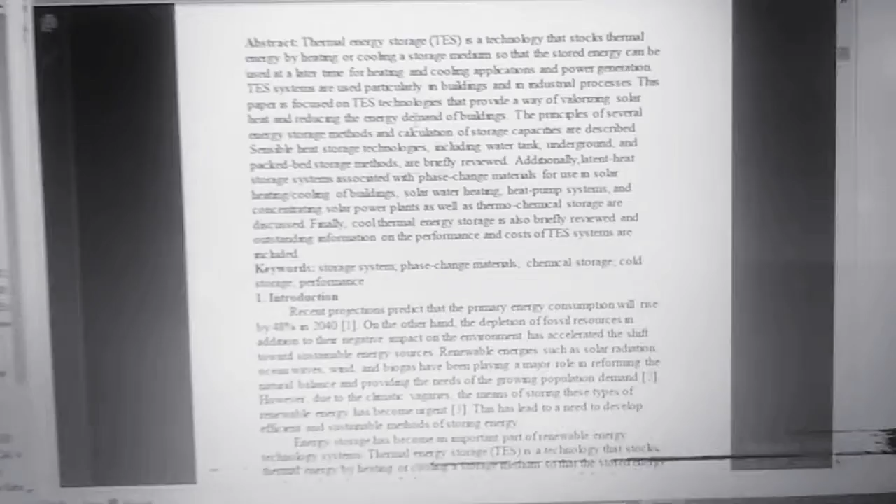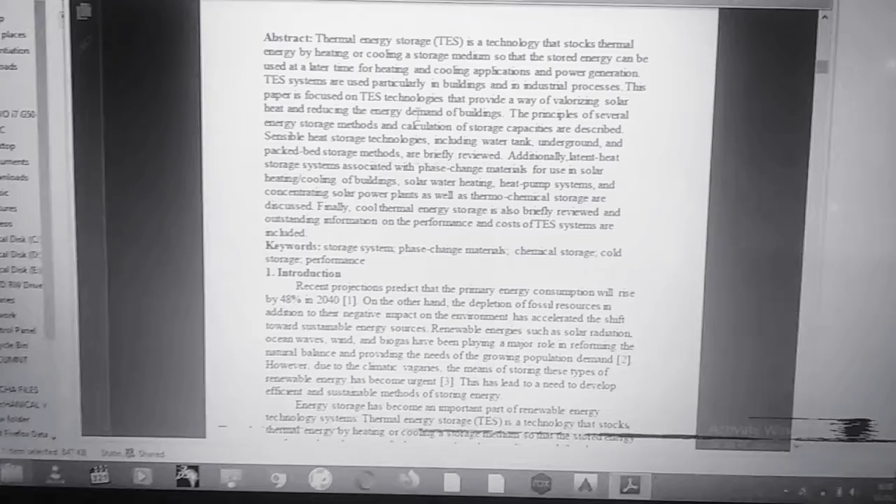Abstract. Thermal energy storage, TES, is a technology that stores thermal energy by heating or cooling a storage medium, so that the stored energy can be used later for heating and cooling applications and power generation. TES systems are used particularly in buildings and industrial processes.

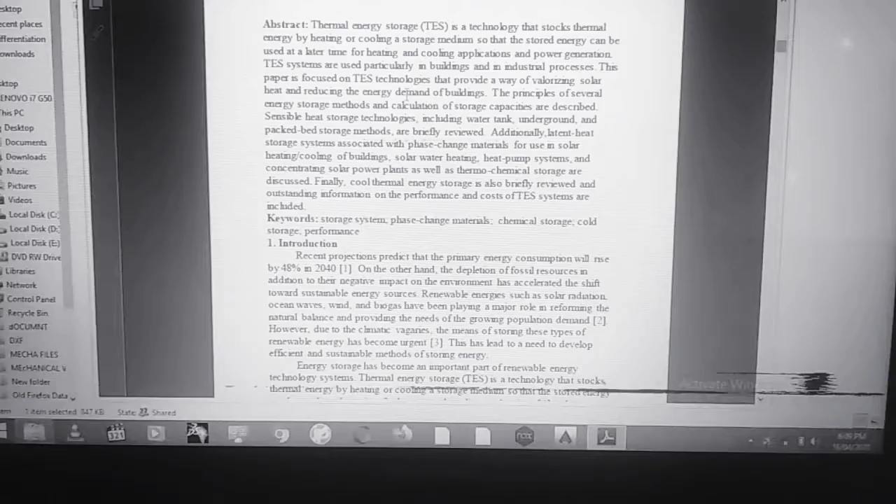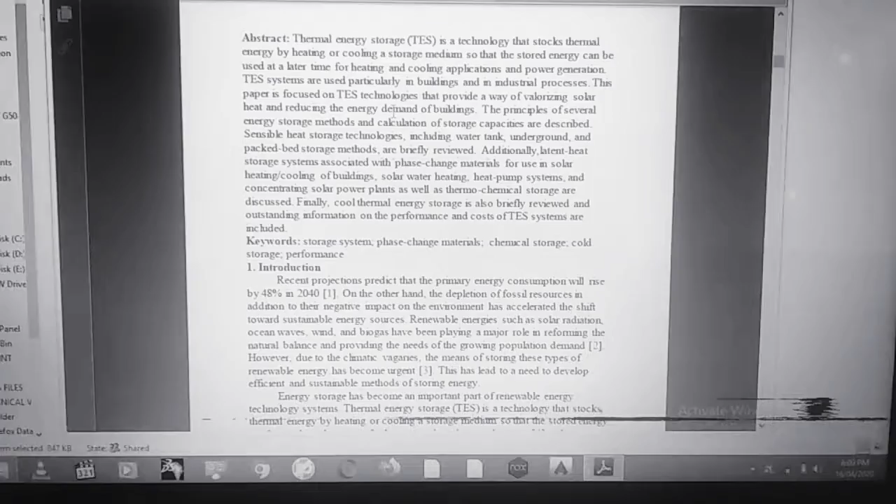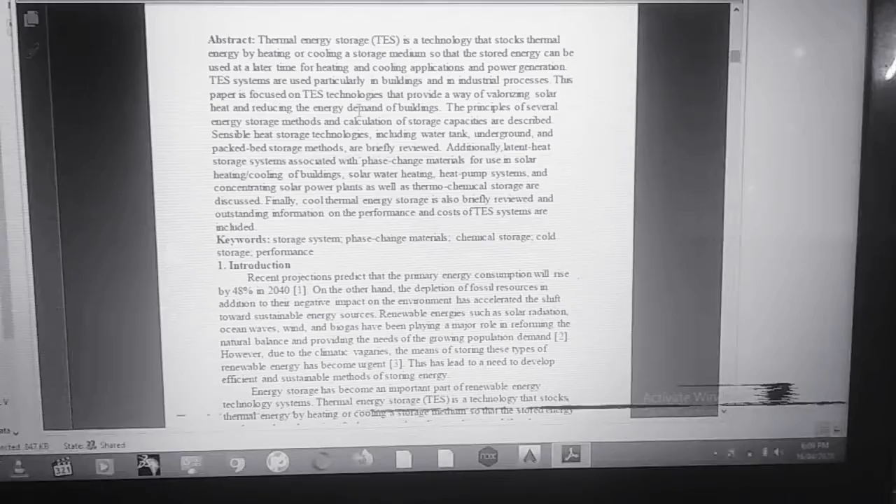This paper focuses on the TES technologies that provide a way of valorizing solar heat and reducing energy demand in buildings. The principles of the several energy storage methods and calculation of the storage capacities are described. Sensible heat storage technologies, including the water tank, underground and packed bed storage methods, are briefly reviewed. Additionally, the latent

heat storage systems associated with phase change materials for use in solar heating and cooling of buildings, solar water heating, heat pump systems, and concentrated solar power plants, as well as thermochemical storage, are discussed. Finally, cool thermal storage systems are briefly reviewed. Outstanding information on the performance and cost of the TES systems is included.

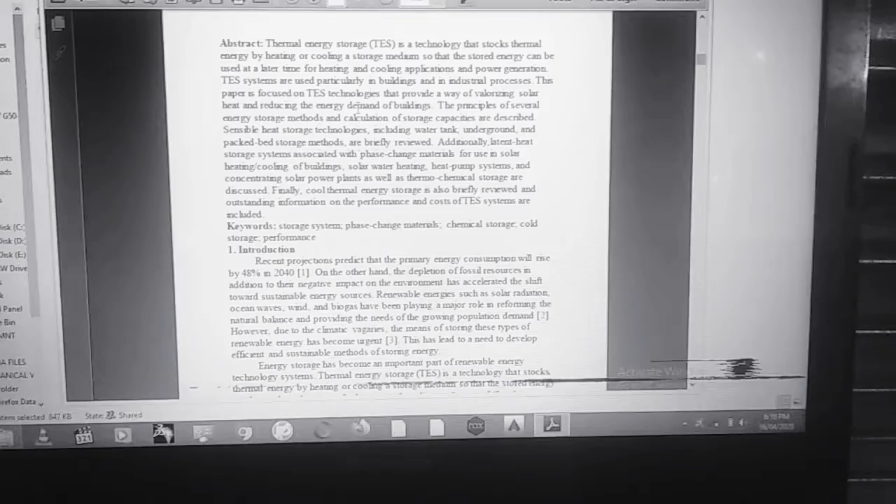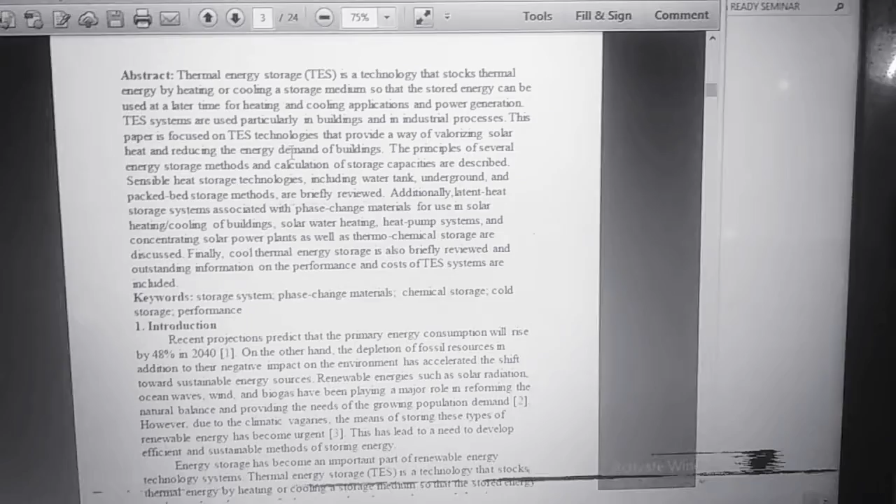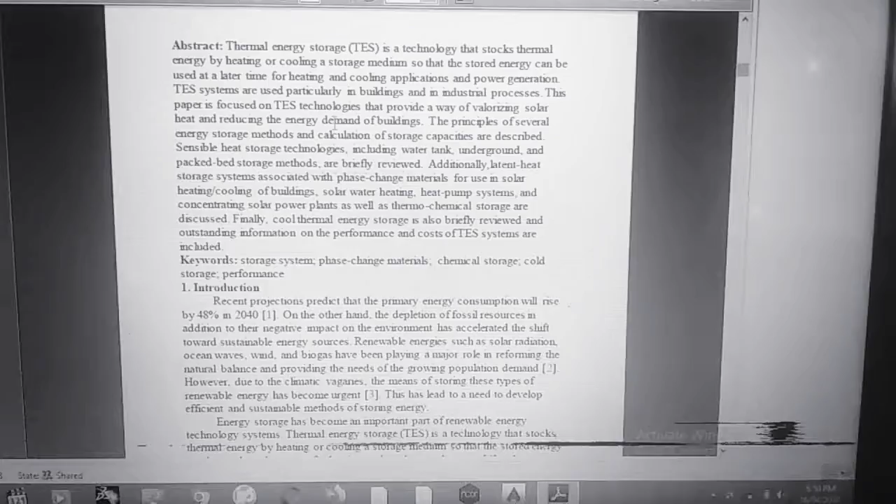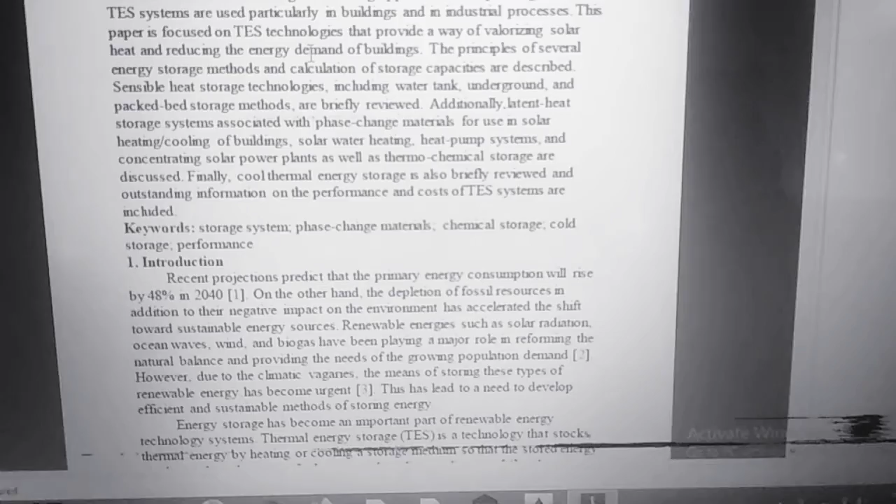Introduction. Recent projections predict that primary energy consumption will rise by 48% in 2040. On the other hand, the depletion of fossil resources, in addition to their negative impact on the environment, has accelerated the shift toward sustainable energy resources, with renewable energy such as solar radiation, ocean waves, and biogas playing a major role in reforming natural balance and providing for the needs of growing population demand.

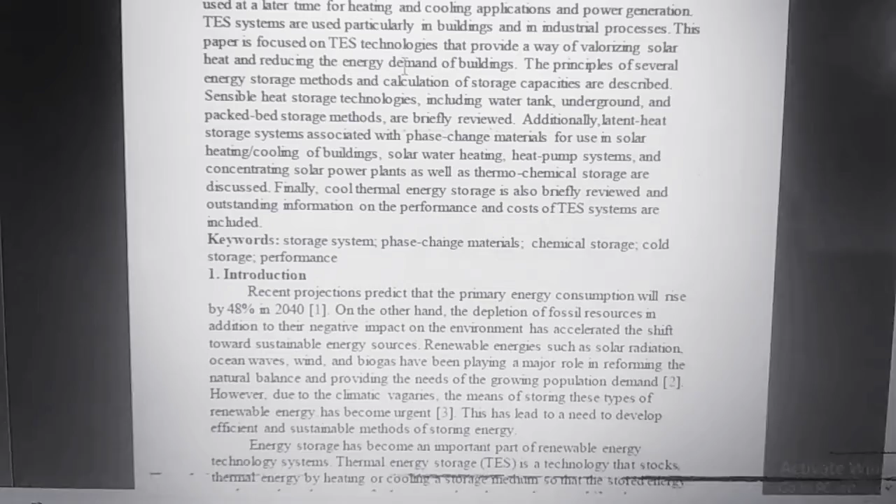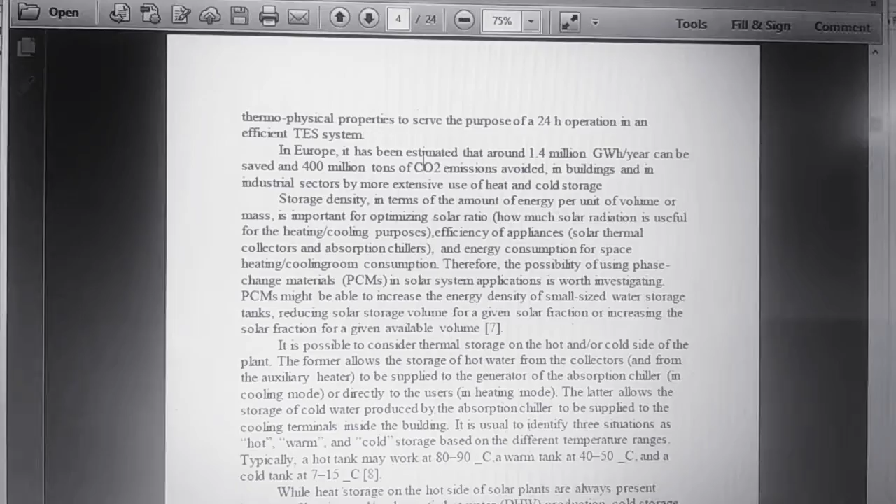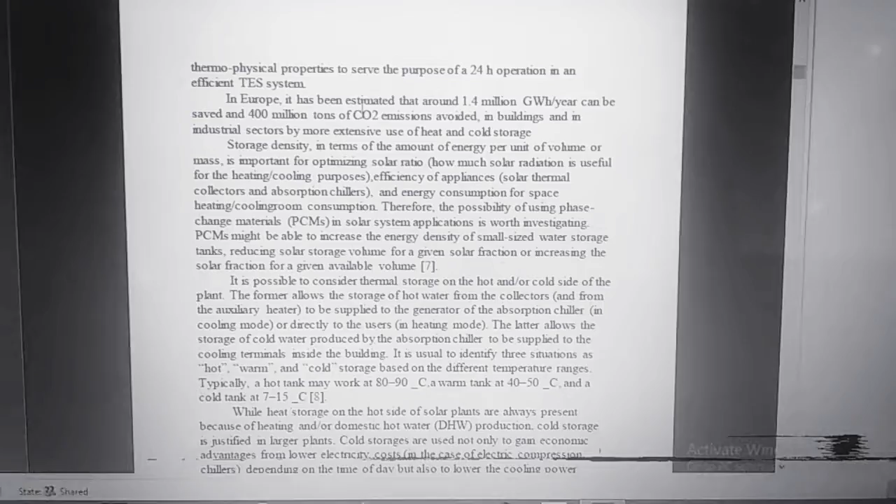Thermophysical properties serve the purpose of 24-hour operation in an efficient TES system. In Europe, it has been estimated that around 1.4 million gigawatt-hours per year can be saved and 400 million tons of CO2 emissions avoided in buildings and the industrial sector by more extensive use of heat and cold storage.

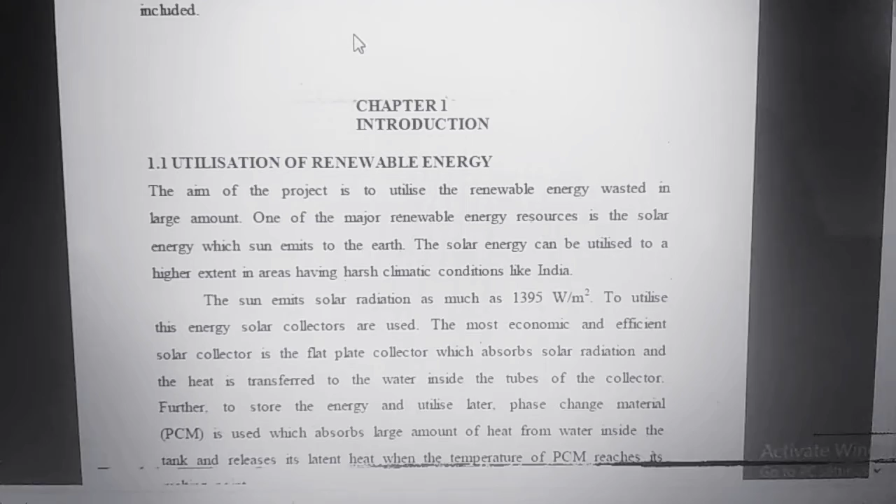Chapter number 1: Utilization of renewable energy. The aim of the project is to utilize the renewable energy wasted in large amounts. One of the major renewable energy resources is solar, which the sun emits. Solar energy can be utilized to a higher extent in areas with climatic conditions like India. The sun emits solar radiation as much as 1395 watts per meter square.

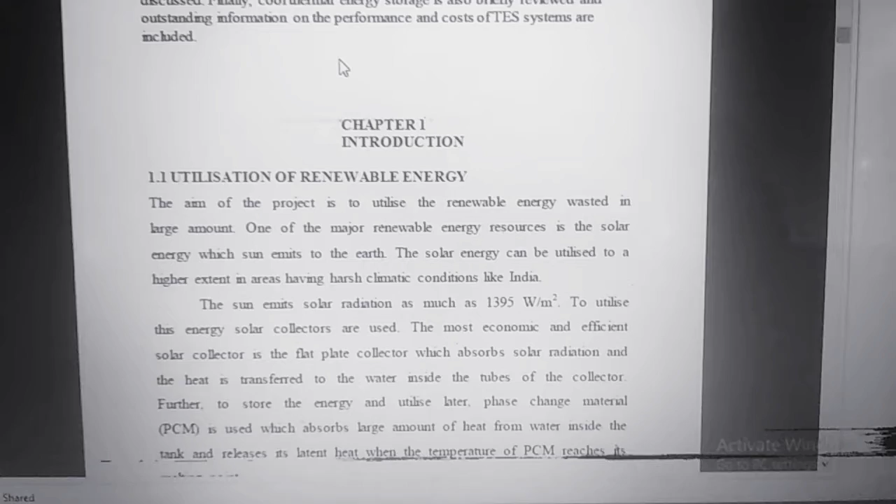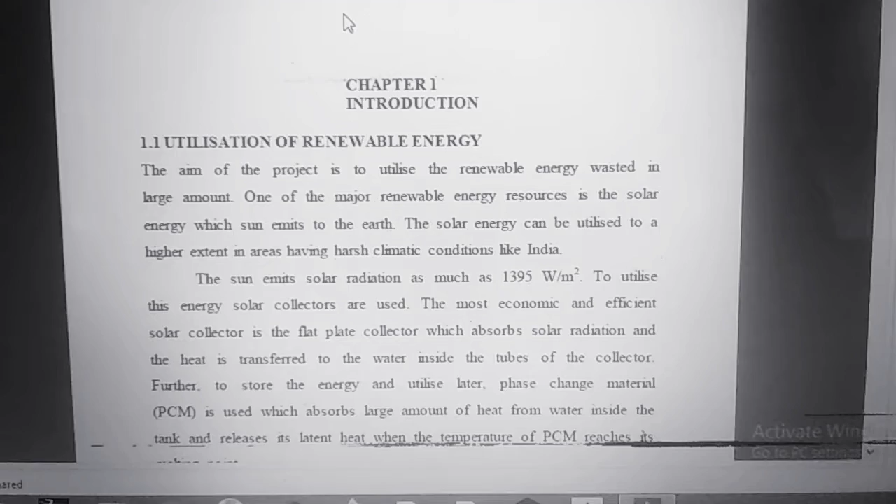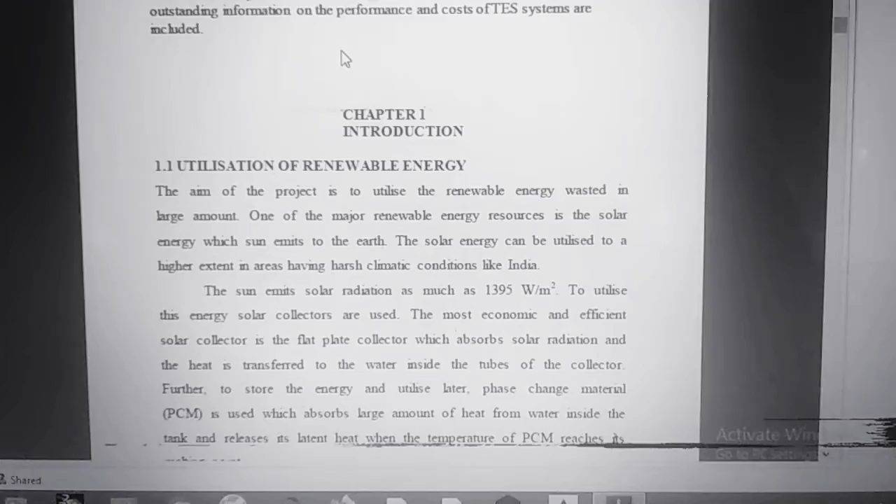To utilize the energy, the most economic and efficient solar collector is a flat plate collector, which absorbs solar radiation and transfers the heat to the water inside the tubes of the collector. To store energy and utilize it later, the phase change material, PCM, is used to absorb a large amount of heat from the water inside the tank and release its latent heat when the temperature reaches its melting point.

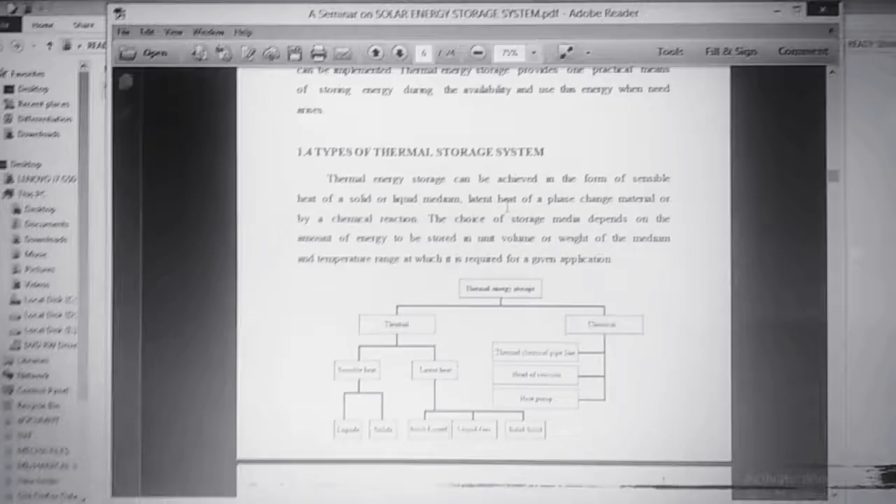Types of thermal storage system. Thermal energy storage can be achieved in the form of sensible heat of a solid or liquid medium, latent heat of a phase change material, or by chemical reaction. The choice of storage medium depends on the amount of energy stored in a unit volume or weight of the medium and the temperature range which is required.

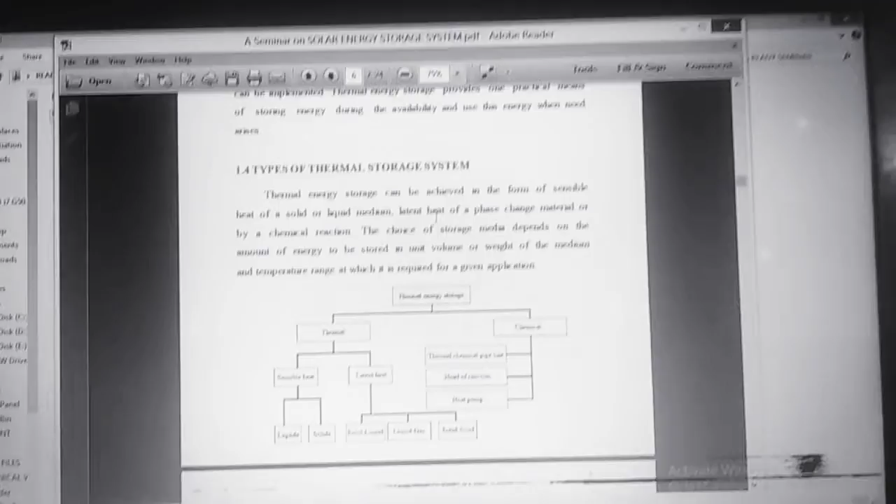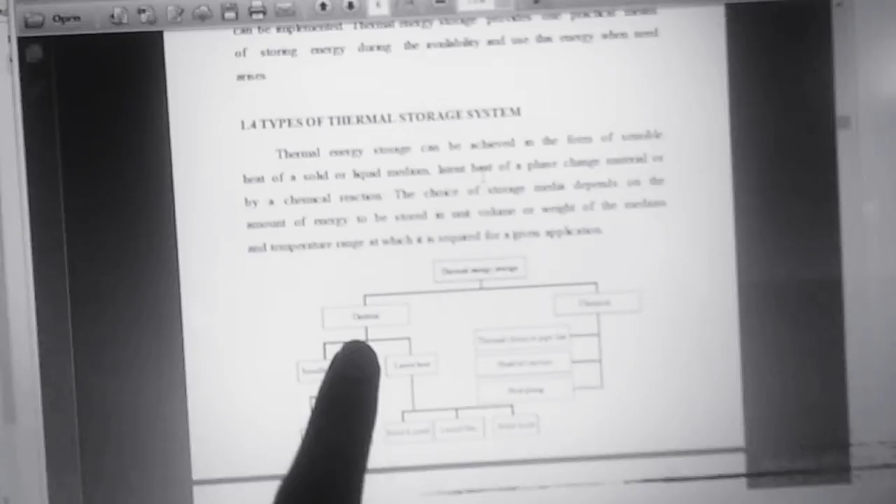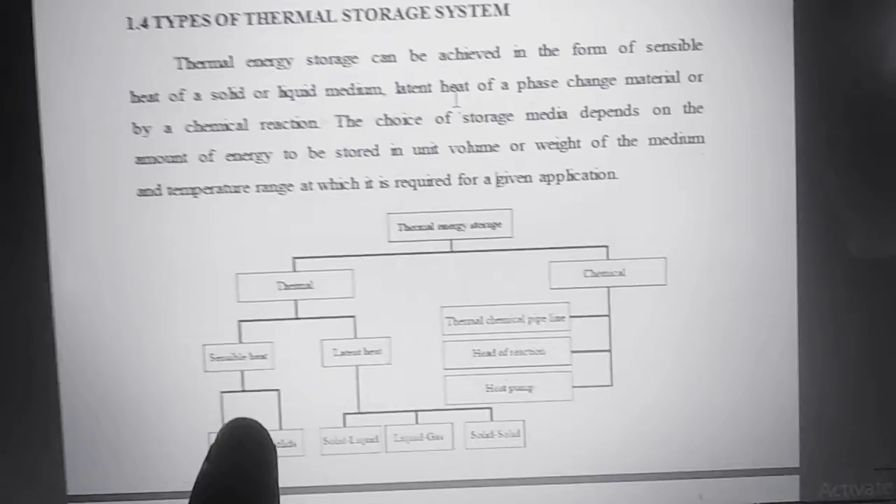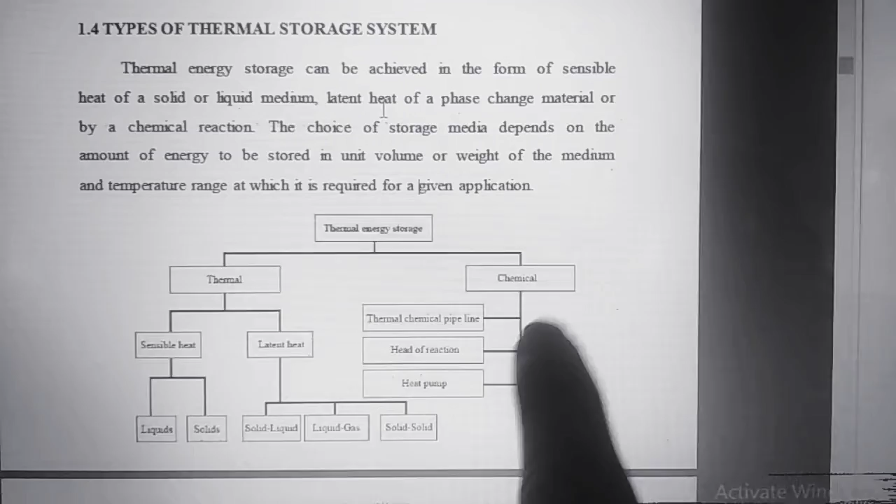Application. Thermal energy storage can be divided into two: thermal and chemical. Thermal is sensible heat and latent heat, and further sensible heat is divided into liquid or solid. Latent heat is further divided into solid-liquid, liquid-gas, and solid-solid. And the other, chemical storage, is thermal chemical pipeline, heat of reaction, or heat pump.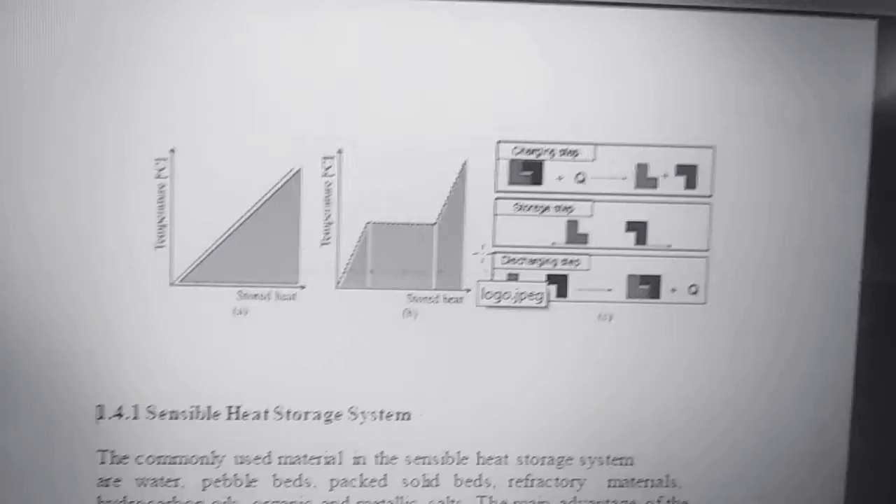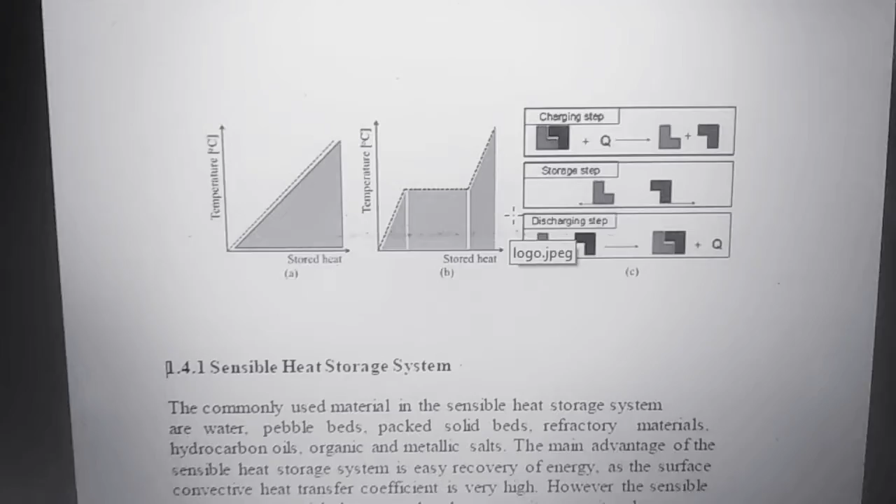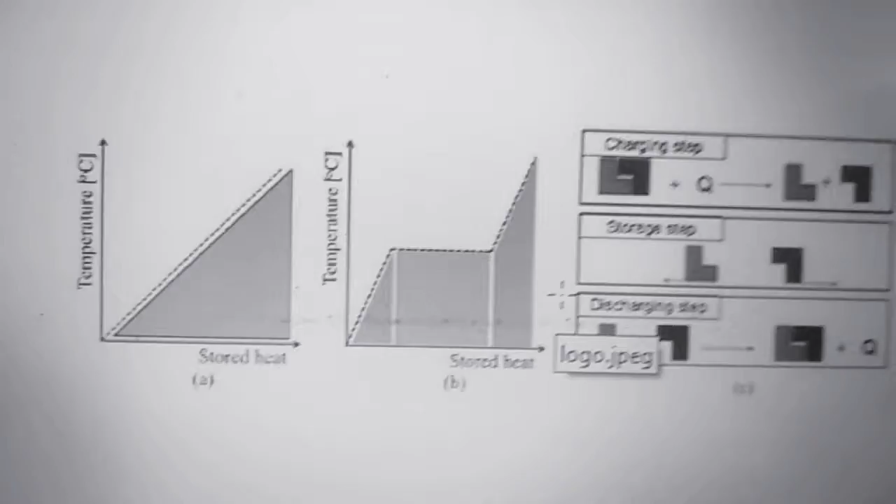Capacity of storage. As temperature increases, stored heat also increases. Temperature is directly proportional to stored heat. If you increase the temperature, you also increase the quantity of stored heat. Okay. It is called a constant phase at a certain temperature.

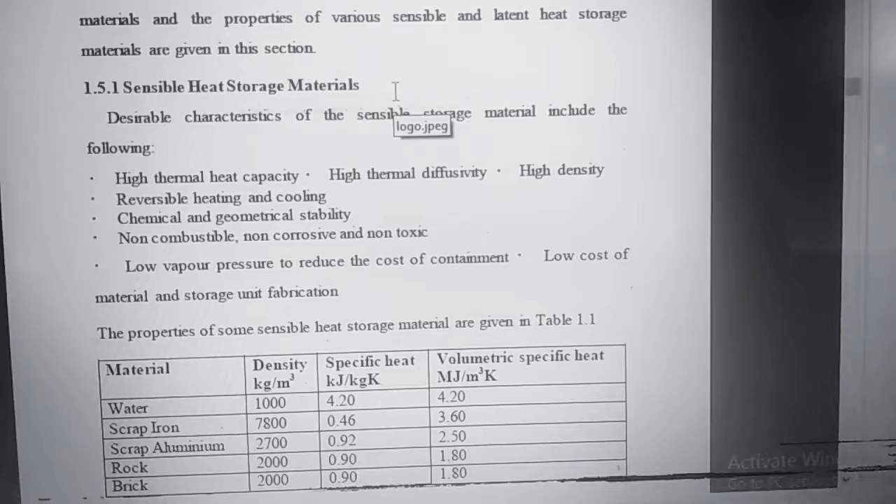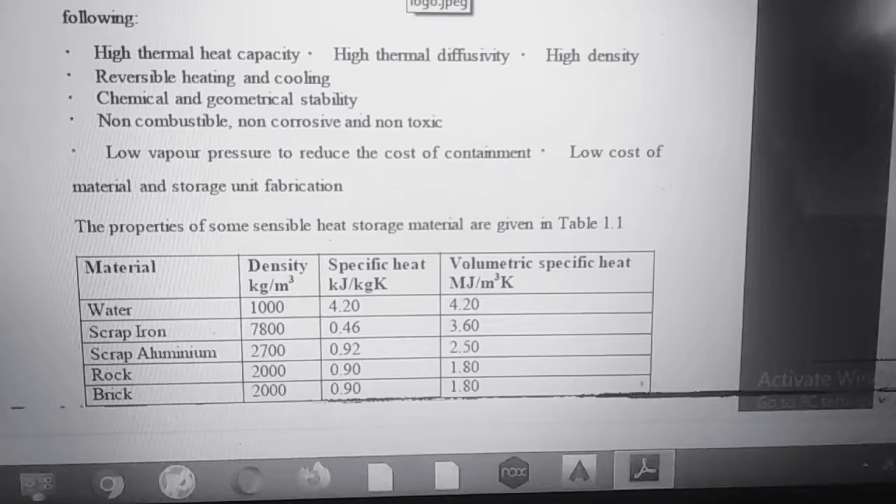Sensible heat storage. The desirable characteristics of a sensible material include the following: high thermal heat capacity, high thermal diffusivity, high density, chemical stability, non-combustible. Water: density 1000, specific heat 4.20, volumetric specific heat 4.20.

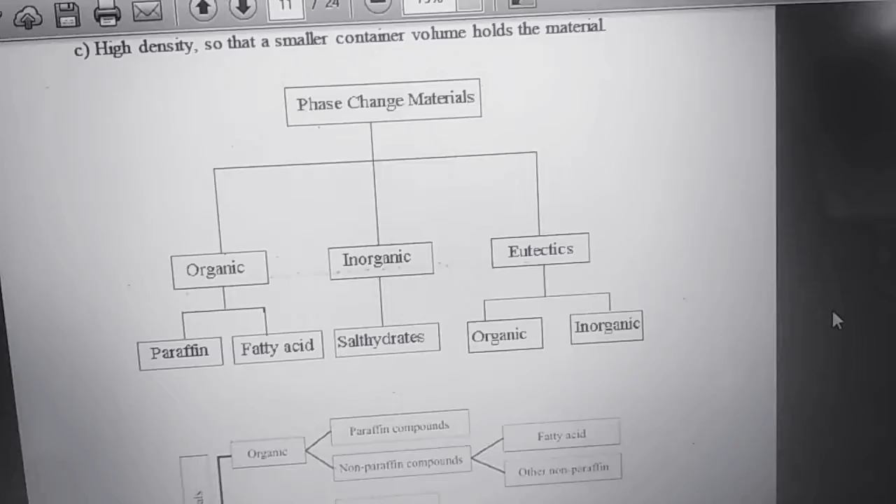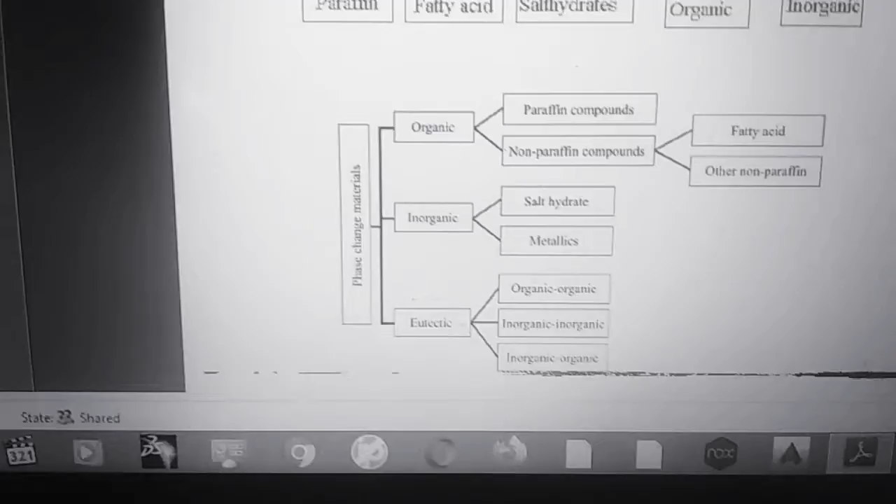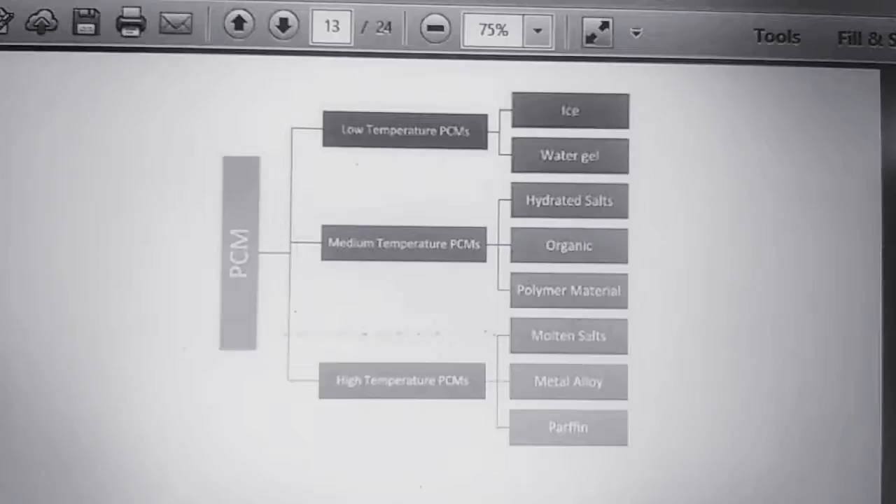A phase change material can be divided into three parts: organic, inorganic, and eutectics. Organic: paraffin, fatty acid; inorganic: salt hydrates; and eutectics: organic and inorganic. Okay, further divided in the figure. PCM: low temperature, medium temperature, high temperature. In low temperature, ice, water, gel. In medium temperature, hydrated salt, organic polymer material. In high temperature, molten salt, metal alloy, paraffin.

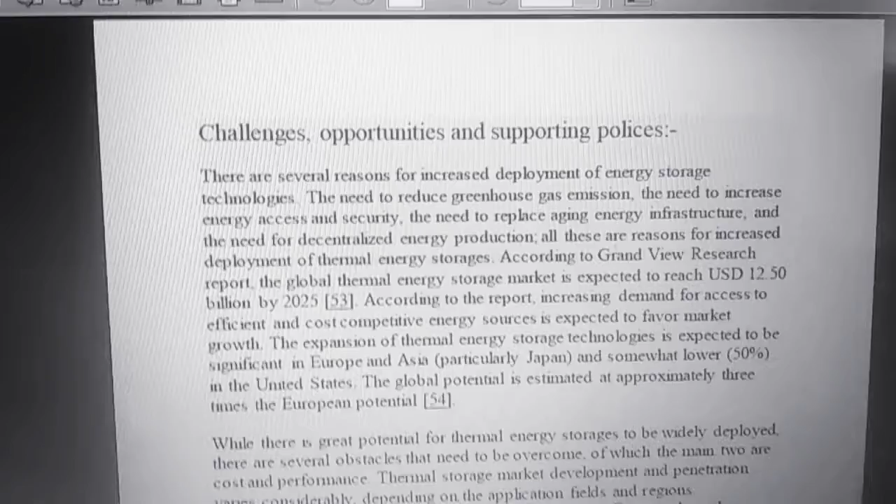Challenges and opportunities, supporting policies. There are several reasons for the increase in deployment of energy storage technology: the need to reduce greenhouse emissions, the need to increase energy access and security, replacing aging energy infrastructure, and the need for decentralized energy production. According to Grand View Research, the energy storage market is expected to reach $12.50 billion by 2025.

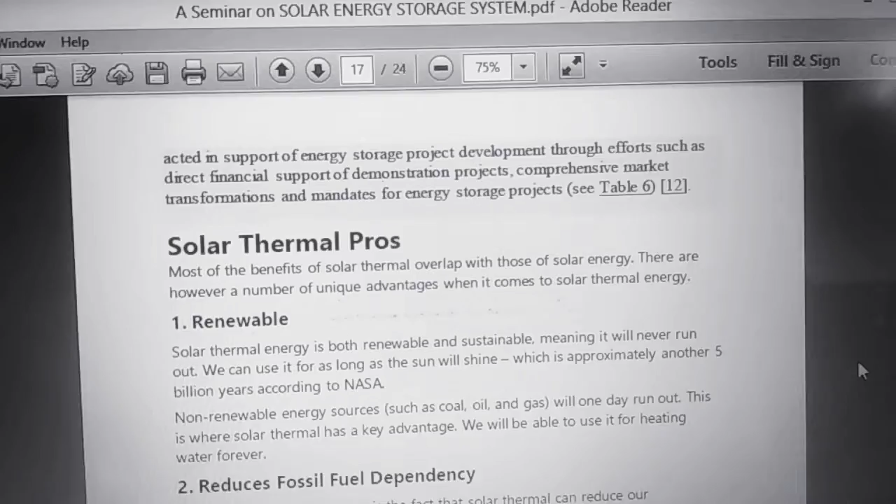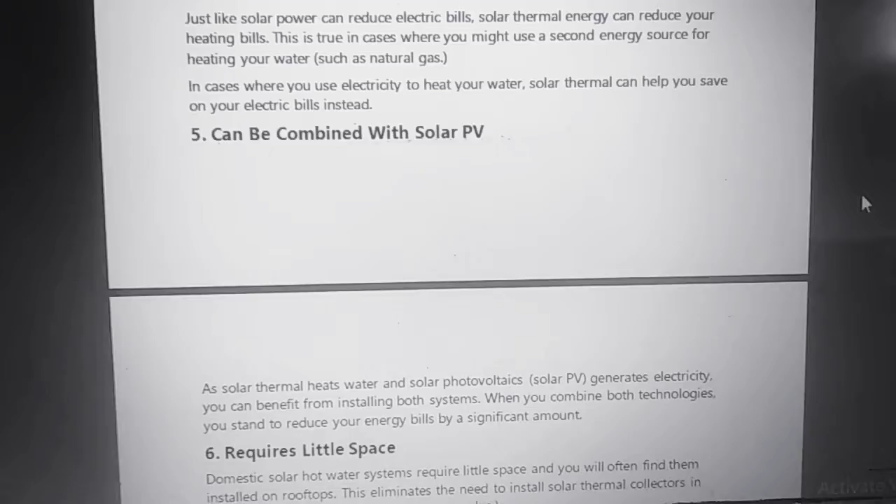Solar thermal pros. Renewable, reduces fossil fuel dependency. Solar thermal is environment friendly. It can be combined with solar PV, photovoltaic. Requires little space. Cheap to run. Established technology. Return on investment, can also generate power.

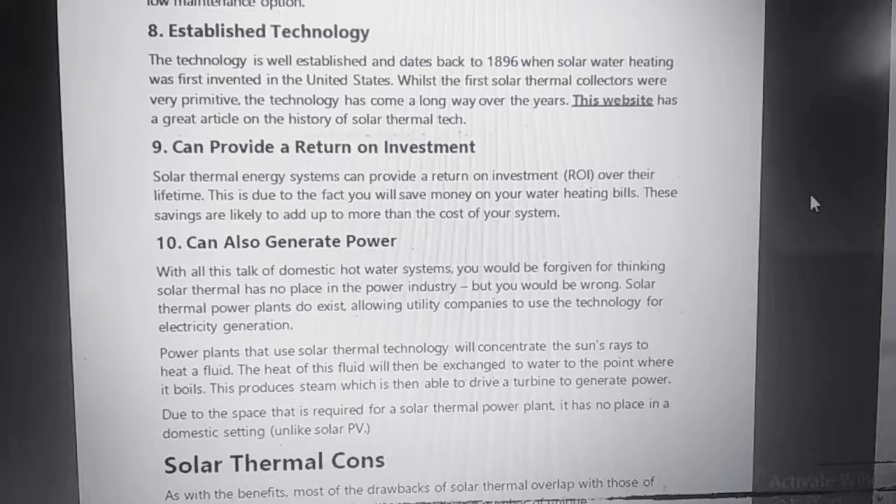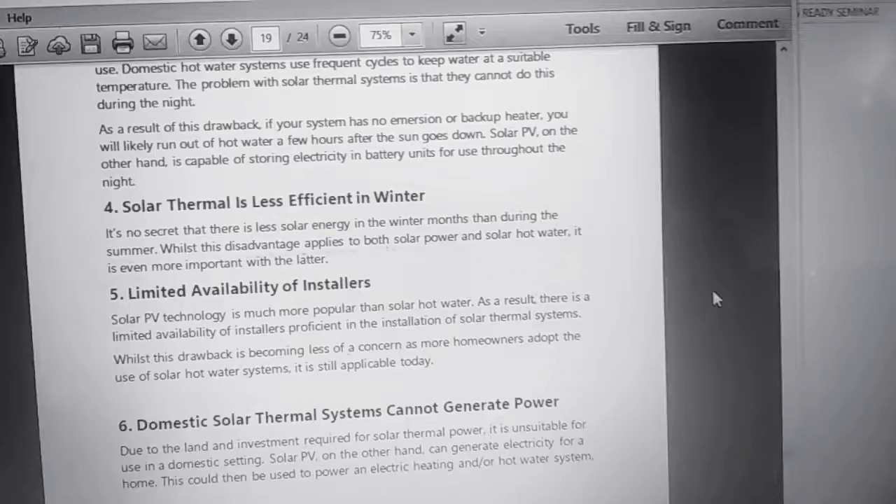Cons: installation is expensive, cannot be used during the night. Hot water cannot be stored for long. Solar thermal is less efficient in winter. Limited availability of installers. Domestic solar thermal systems cannot generate power.

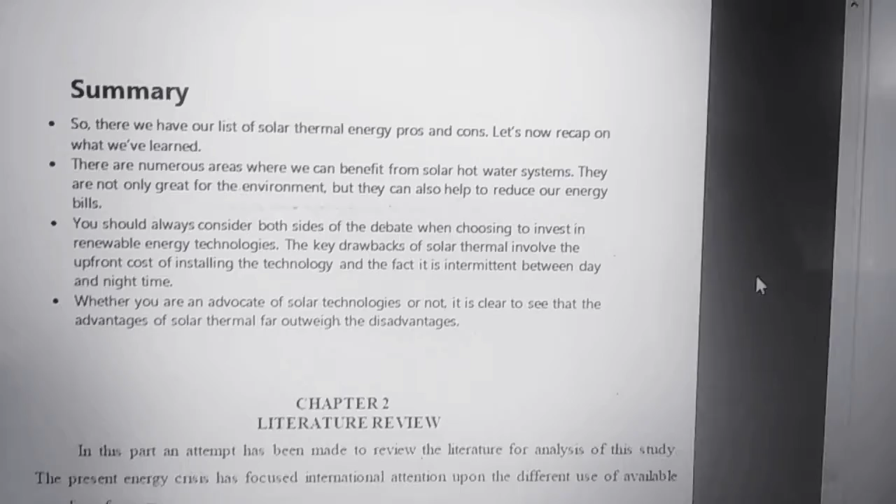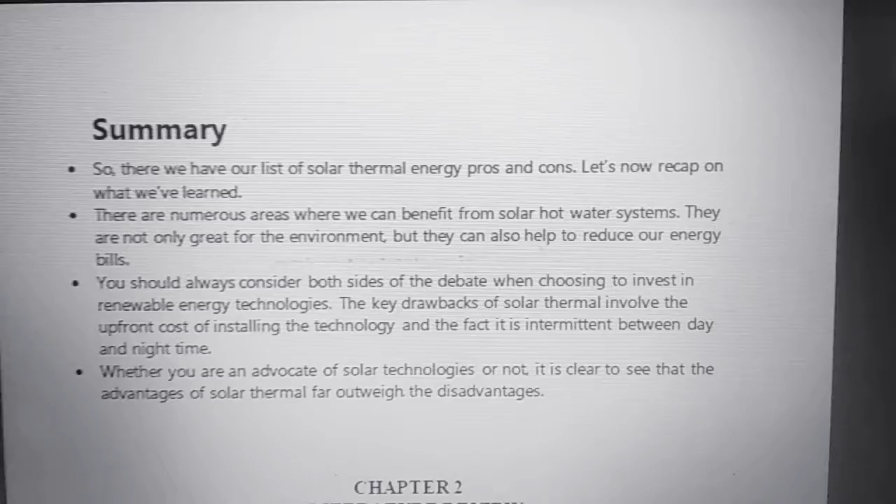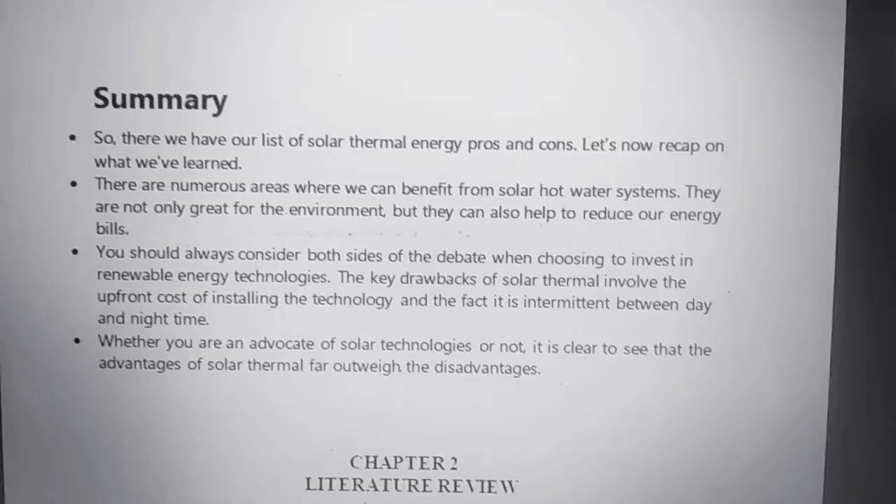Okay, summary. So we have our list of solar thermal energy pros and cons. Let me recap what we learned. In numerous areas we can benefit from hot water systems. They are not only great for the environment, but they can also help to reduce energy bills. Whether you are an advocate of solar technology or not, it is clear to see that the advantages of solar thermal far outweigh the disadvantages.

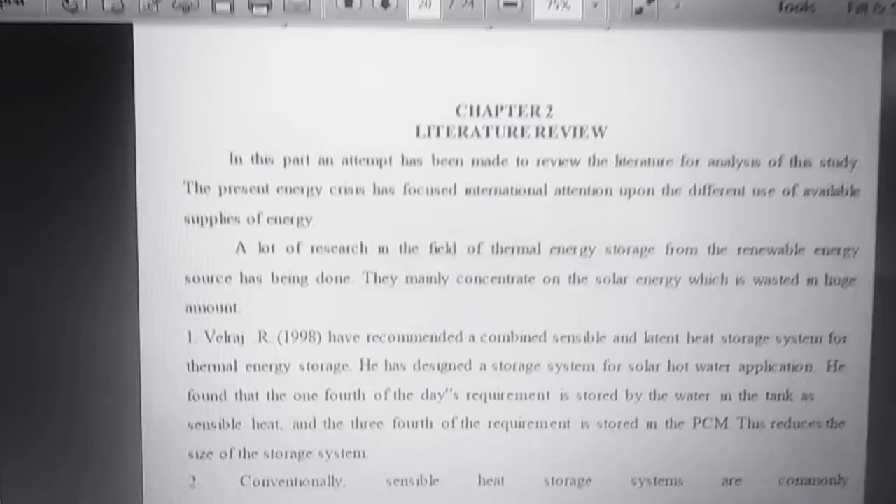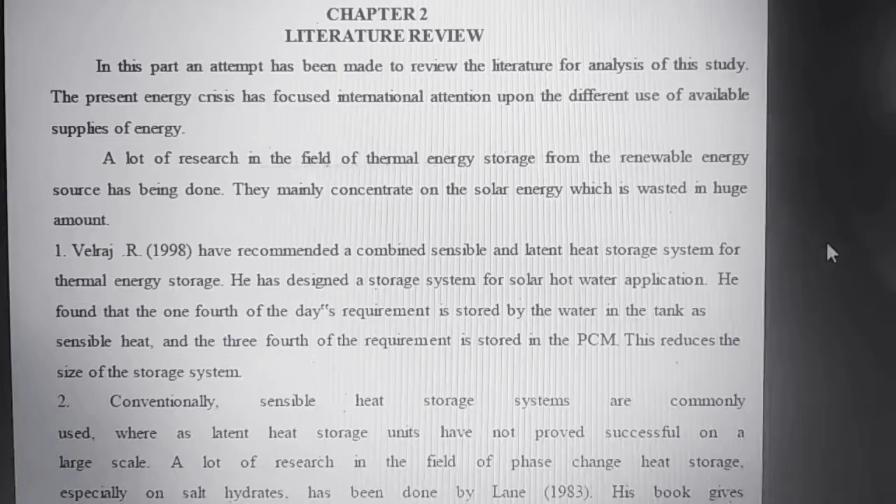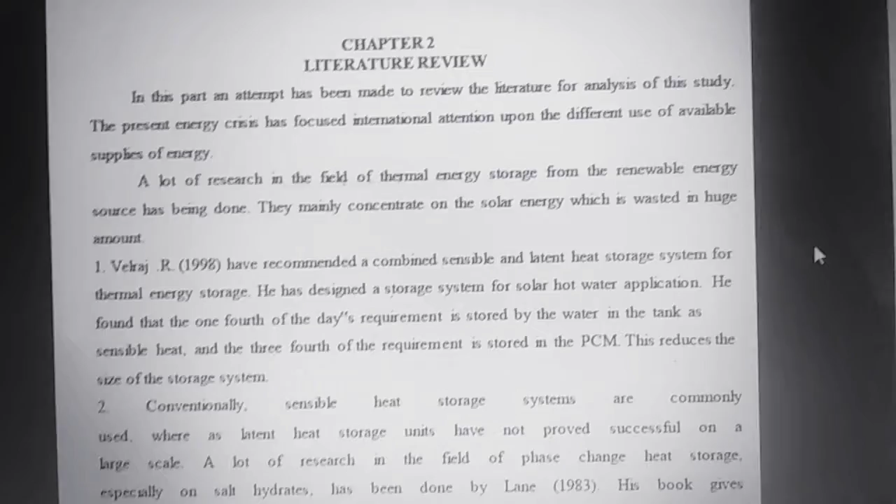Literature review. Velraj R., 1998, recommended the combined sensible and latent heat system for thermal energy. He designed the storage system for the solar water application. He found that 1/4 of the daily requirement is stored by the water in the tank as sensible heat, and 3/4 of the requirement is stored in the PCM. It reduces the size of the storage system.